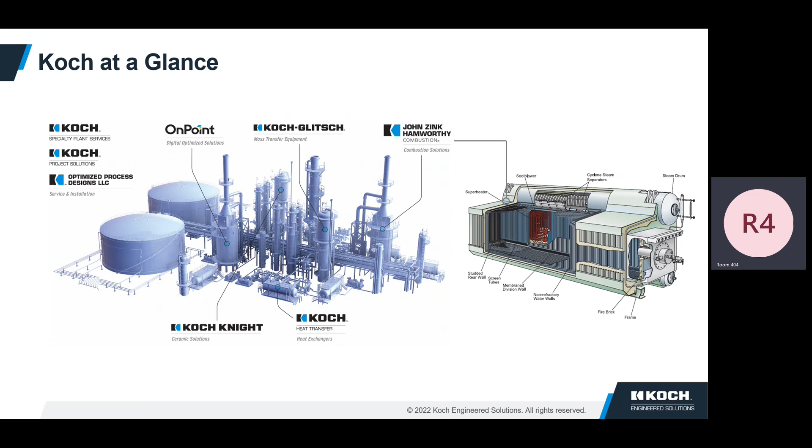But anyway, so what's driving our interest in hydrogen? We're all about greenhouse gas and the carbon footprint, stuff like that. And so...

This is nothing new. In various industries, people have been burning hydrogen for a while, and sometimes it's planned and sometimes it hasn't been. Like ethylene producers and stuff, they generate a lot of hydrogen, so they burn it in their process already. And there's been a lot of issues, but a lot of really good time-tested experience as far as how that works. And then sometimes in refineries, depending on how their fuel system is, sometimes they get to a hydrogen imbalance.

Like maybe a hydrogen consumer goes down, they're still generating a bunch of hydrogen, then they dump all this hydrogen in the fuel, and then they start seeing where that happens. Because a lot of folks have come to the various burner people and asked me, what does this mean to us? And we're going to touch on some of that too as far as the process. But actually, my question back is, sometimes you've been doing it already, you can just go back to your other situations and look at that as well.

So anyway, where are we getting this fuel from is going to be another thing. And we'll be comparing the fuel comparisons, comparing natural gas, hydrogen, and ammonia, and also other system considerations like the equipment, the safety part of it, transportation, and what's the impact on emissions. That's the two big ones right there, the hydrogen and the ammonia compounds.

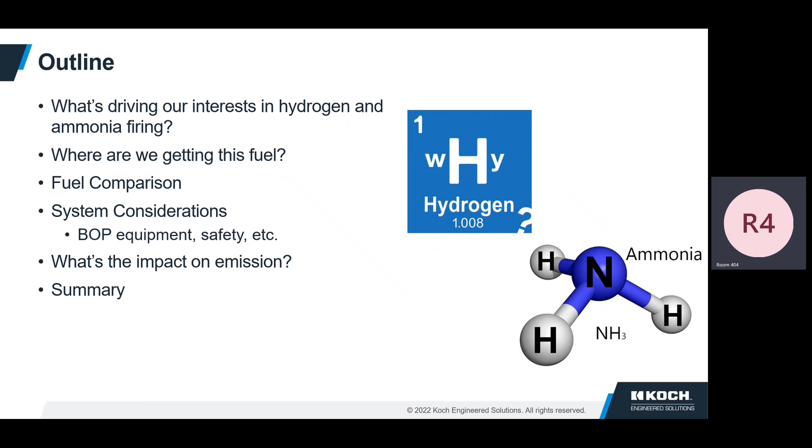So the future of combustion: how to convert the combustion process to reduce or eliminate carbon emissions.

Challenges - there's no easy substitution for combustion, so it's going to be there. We've got a huge base already, so how do we make that better? One of the potential solutions, like we already talked about, is green fuels - hydrogen and ammonia.

We've been going down this path for a while, and since the 90s we started changing burner technology to get lower emissions. What we found out when we started pushing those envelopes is that natural gas is not our friend in the burner world. It really isn't, because the flammability range of natural gas is much narrower than the other components here.

So the burner may work with a blend, and really as a burner manufacturer we love hydrogen - it reacts so fast to combustion, and it makes the burner real stable. But when we get away from that blend and go ahead and have just natural gas, the burner may become unstable, which has some issues.

Along those lines, it really took the industry about 12 years to understand as we progressed burner technology to ultra low NOx burners. No matter whose technology it was, the ultra low NOx burner was the square peg, and the heater was the round hole - and we're trying to make that fit.

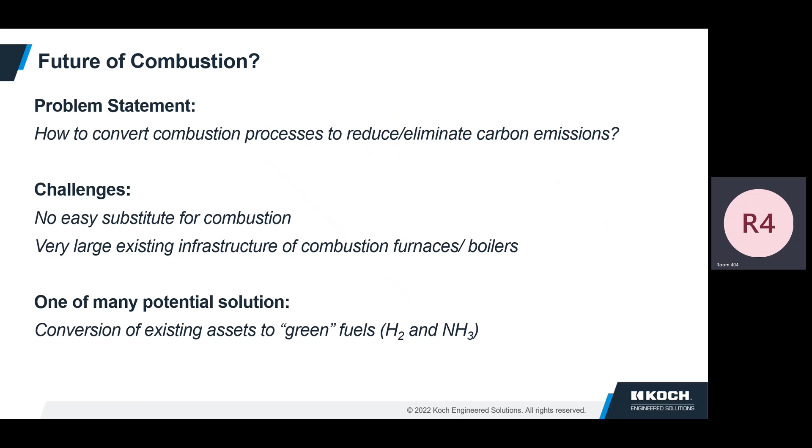People are talking about transportation, so they go ahead and liquefy it. European communities are getting geared up for liquid hydrogen deliveries, and a lot of people say we could use existing infrastructure such as LNG tankers to bring it over. But let's touch on the properties here relative to hydrogen versus LNG, specifically the boiling point.

If we're going to use an LNG tanker to transport liquid hydrogen from the Gulf Coast to Europe - LNG boil-off rates are typically about 0.1% per day. Using the same vessels, the same amount of insulation, the boil-off rate for hydrogen is 1%. That's a huge volume difference. It takes 10 days to get there, so that's 10% of the volume lost, plus the fact that the heating value is much less as well. So there's a huge imbalance there.

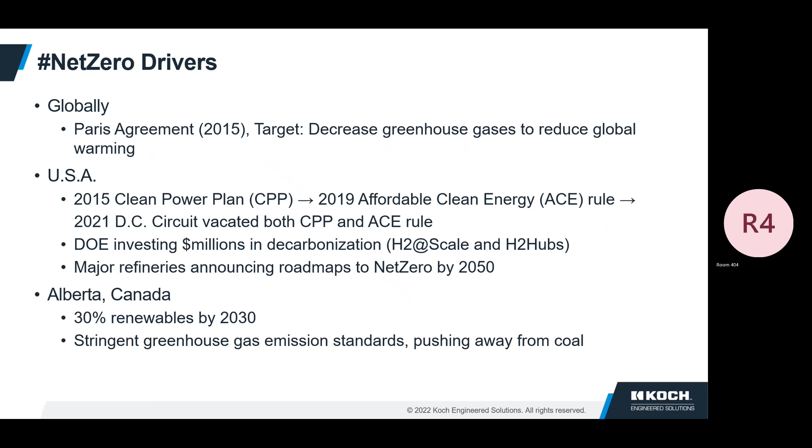So there's going to be a lot of learning as we go down these paths, much like what we had with the ultra low NOx burner technology - and that's all the drive, regulatory stuff and issues that go into it.

So where are we getting it from? Some of the hydrogen we're getting from water electrolysis, steam methane reformers, and ammonia. There's a lot of it. Actually, about 5 years ago, one of the major U.S. ammonia producers told me off to the side, I was at the site and they said we're going to market ammonia as the next fuel.

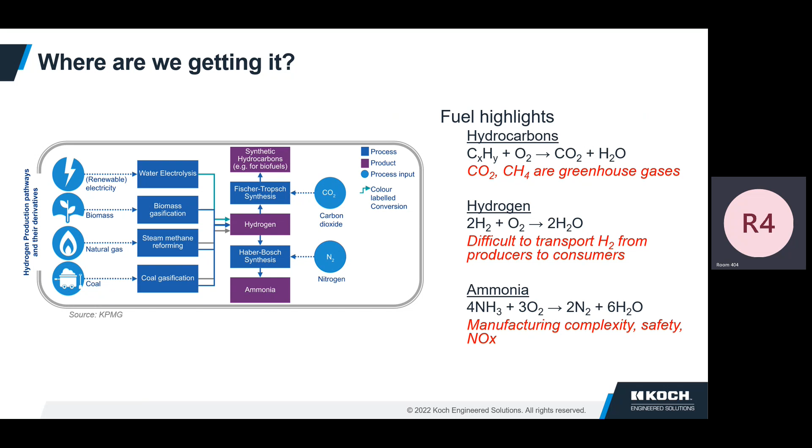Now, what drugs are you on? How is it going to work? Anhydrous ammonia - we can't even get anhydrous chlorine into some plants, and now you want tons of ammonia? But it's coming that way. It's going that way.

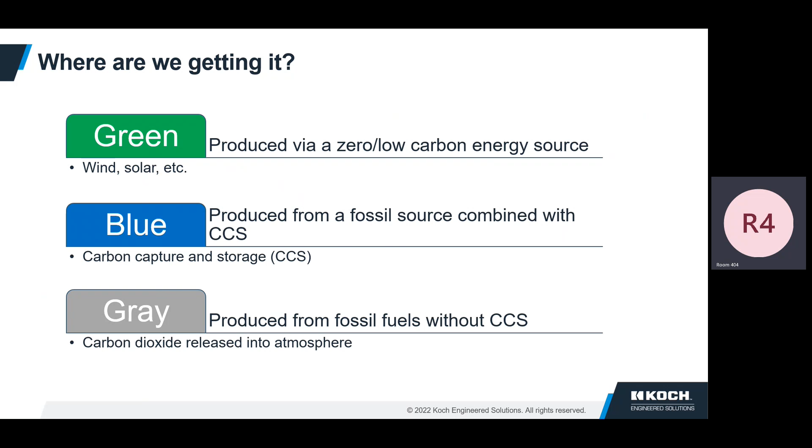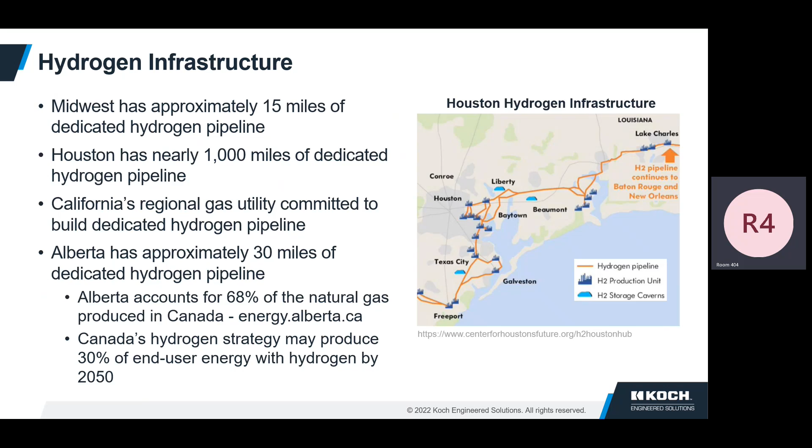We see a lot of people looking at the rationale of putting hydrogen producers on-site versus transporting it, but then looking at being able to export it out of the facility and capture carbon at the site. So there's good infrastructure keeping hydrogen as a gas, which is good. You can see relative to where the production units are, it's along the pipelines, and there'll be more of that to come. And here's the ammonia production.

So that's not much of a problem leaking as opposed to hydrogen. And of course the heating values are differences in the flame speed. Hydrogen is 7 times faster than natural gas, and ammonia is slower than natural gas. Why is that a problem? Well, the reaction time for hydrogen is much faster, and that's why it generates such NOx. Ammonia generates a bunch of NOx as well, because it's in the fuel bound versus the flame temperature.

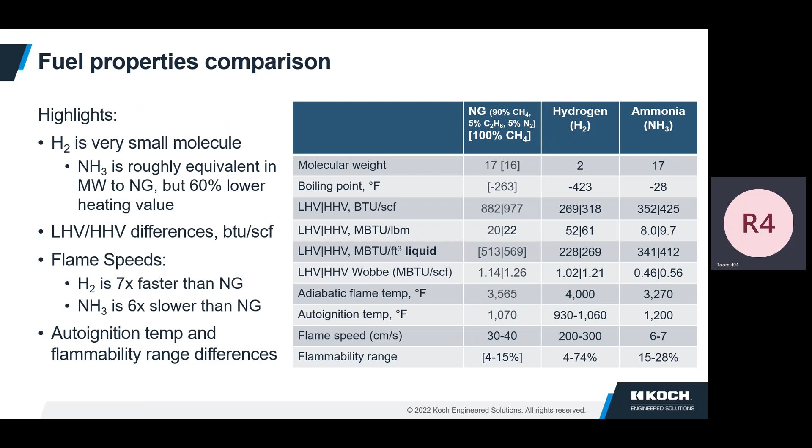They carry greenhouse gas, but because this hydrogen reacts so fast, it will lead that reaction first - there's a fixed amount of OH radical in the atmosphere. As hydrogen leaks more into the atmosphere, the reaction is going to be preferentially faster to react with the hydrogen and not with the methane. So the methane greenhouse gas effect will get worse in the short term if there's a predominant shift to more hydrogen leaks - that just came out earlier this year. So, like I said, there's a lot more learnings going on relative to hydrogen, alternative fuel stuff.

Interest in ammonia and hydrogen fuels - ammonia is definitely easily liquefied, easy to transport for sure. Doesn't have the boiling point, does not leak as easily. Consumes cost per unit, cheaper than hydrogen for sure. And it does reduce the combustion air fan size because its air requirements are a little less than - this is all reference to natural gas.

The hydrogen, there's a big emphasis on continued development of hydrogen hubs and infrastructure, high amounts of flue gas recirculation, and aggressive staging of the fuel as part of the technology we use at burner to reduce the NOx. And there's going to be even more going on with that. Several of the burner manufacturers are investing in having in-house ammonia facilities at their plants in order to help bring that technology more with more R&D inside their R&D centers.

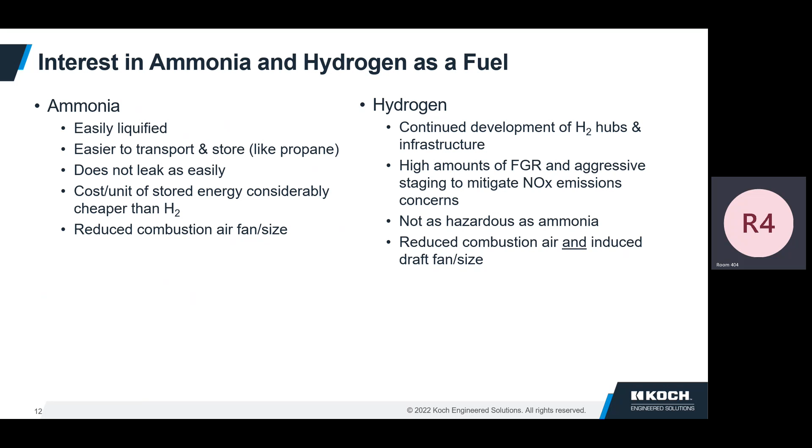And it's definitely not as hazardous as ammonia. And reduced combustion air and induced draft size, because since hydrogen reacts so quickly and requires less oxygen or air, the mass flow in the furnace drops a whole lot. So you see a shift inside the heat flux inside the furnace relative to natural gas firing. There's a lot of other things to consider relative to the effects it has in the process heaters when you swap out the fuel components, especially the hydrogen.

So here we have the combustion fundamentals relative to combustion air and fuel gas impacts. There's 22% less air requirement for hydrogen, 13% less for ammonia. Again, this is reflecting to natural gas. I should have probably had different colors for the three, because the blue is the fuel, the orange is the air, and the gray is the products of combustion generated off the particular fuel.

You can see with natural gas being the standard, ammonia requires more fuel for a given heat release you want. If you want to heat up something to say 1 million BTUs, for argument, it's going to take more ammonia than natural gas to get that desired heat. The combustion air will be less, but the combustion products will be higher. Hydrogen, you see, is going to require a lot more hydrogen because the heating value of hydrogen is so much less than natural gas. Natural gas is over in the 900s, hydrogen's in the 300s. So you see, it's going to be taking more.

So the system pressure, you need to squeeze more pressure into the system. But you see the air requirement is much less, that's the trend here. And the combustion byproducts are less, and that's because there's less air. I say air because air is oxygen and nitrogen - that freebie of nitrogen in the air, 79-80%, that freeloader goes in there, right? So if you have less air, that's less total mass.

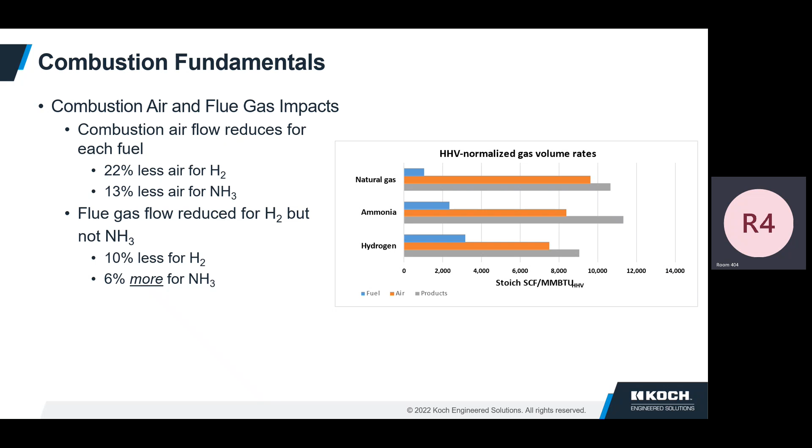I've seen it at a plant - besides the jobs prior to that, I was with ExxonMobil for a number of years, and we would have an isolation valve around a hydrogen compressor. It would leak through all the time. So we would take that valve out, test it, and it would pass the leak test, with certain criteria. Then we'd put it into a different application - it didn't do anything to it, it didn't leak at all. Because the hydrogen just found its way through it, being such a small molecule. And the pressures were different too, really, in actuality.

Ammonia, as we know, is a big hazard - definitely more hazardous to personnel, more toxic to personnel and the environment upon exposure versus the other two fuels. But it also has, because of that heavy base, a high concentration of corrosion products that can start generating as well. Because we're talking about most of it being anhydrous ammonia, and you have to deal with that stuff, so there's a lot of other corrosion processes that happen.

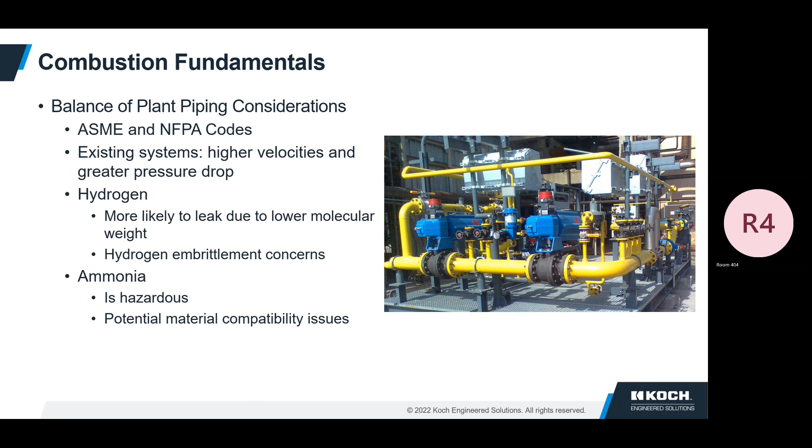Burner impacts include flame speed concerns for flame detection, because that deals too when burning high hydrogen fuels. Not only is the flame speed different, but the visible spectrum is also different, so some conventional scanners may be a little more challenged picking up flame detection. There's also burner technology concerns, depending on whether it's a raw gas or pre-mixed burner, because pre-mixed burners act very much like your barbecue pit—it will burn back in there with higher percentages of hydrogen.

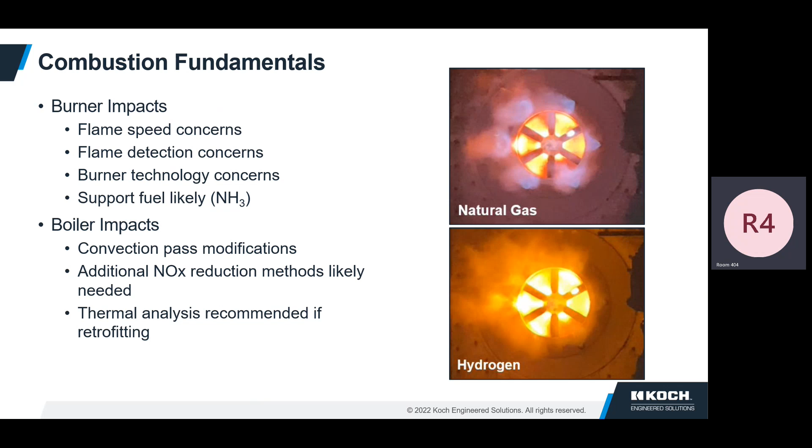Boiler impacts include equipment's convection section pass modifications, because of the less mass flow of the flue gas combustion products. The heat balance in the boiler will definitely be affected more so than in process heaters, and additional NOx reduction methods are likely needed for that, along with thermal analysis of the differences in heat flux profiles from burning the alternative fuels.

For emissions, burner NOx results show greater thermal NOx in hydrogen versus natural gas, due to a lot hotter flame temperature. For those who don't know, in ultra low NOx burner technology what we do is try to reduce the flame temperature—we're not reducing the heat level. We do it by using preloaded nitrogen to go in there and help absorb the combustion reaction. That's all it is, a reaction. The heat of that reaction lowers the flame temperature, which then attacks the thermal NOx.

There are three different ways for NOx to be generated: one's thermal NOx, one's fuel NOx, and one's prompt NOx—that's another animal altogether. But there's no prompt NOx contribution from hydrogen. And of course, the influence of hydrogen on NOx emissions strongly depends on the burner technology, which it does.

For mitigation, you add or increase the FGR, flue gas recirculation, which tries to reduce the flame temperature even further. But you get to a point where you may start getting into burn stability issues if you reduce it too much. If you start shifting—since it's a chemical reaction—if the reaction temperature starts to drop off, the flame may not be as stable.

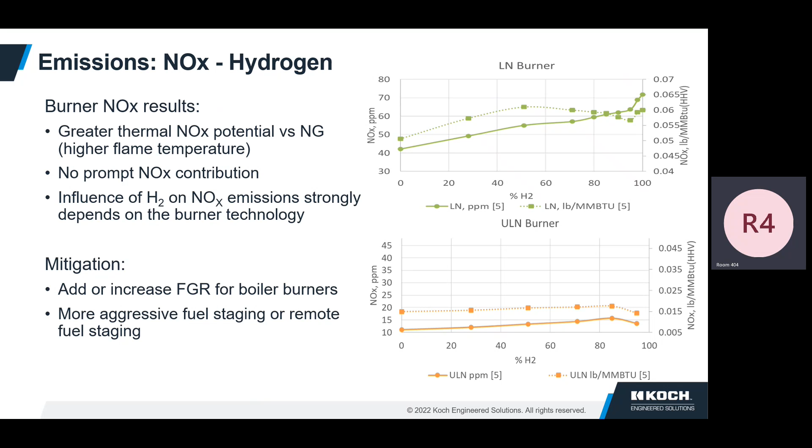Then there's more aggressive fuel staging or remote fuel staging—another technique. Instead of bringing external flue gas recirculation into the burner, we inject the fuel out into more of the inert part of the furnace or boiler in order to reduce the flame temperature or lower the heat flux inside the furnace.

Now we're talking about ammonia emissions. It's a precursor for NOx because it's got fuel-bound nitrogen in it—that's part of NOx. It's a big nitrogen thing; on the other side, it's NOx in the air, but here we get NOx in the fuel. Definitely we don't like that—as burner people, we don't like that.

Like I said before, it took us 12 years to figure out how staging fuel took care of the effects on process heaters and stuff. We have a learning curve here as well.

Typically it's like several hundred ppm with an optimized burner for ammonia, versus several thousand ppm otherwise. With staged fuel ultra low NOx burners, current technology that's been out there for a while gets maybe 20 ppm thereabouts. Various burn technologies coming out now are getting sub-10 ppm or even sub-5 ppm. With ammonia, you see it's from several hundred to several thousand.

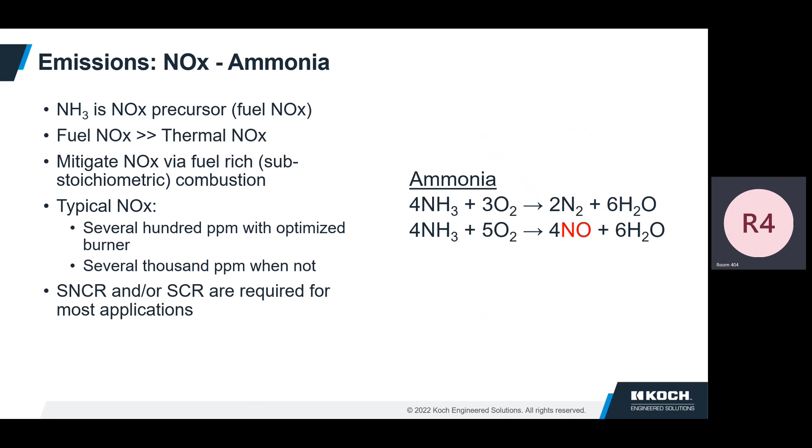So R&D is continuing—everyone's doing R&D on that. Hydrogen test burns at Tulsa, we've been doing, even before '21, because a lot of plants were already doing it, and we were reacting to that even back then, prior to it.

Ultra low NOx burner technology with fresh air, preheated air, comes into play when dealing with thermal NOx. Some burn technologies, even the latest stuff out there now, aren't impacted as much by preheated air because of the technology employed. Additional flue gas recirculation for NOx reduction is pretty significant, which we're seeing in newer burner technology—we get down to single-digit NOx emissions for the hydrogen part, and it's very stable at high flue gas recirculation rates.

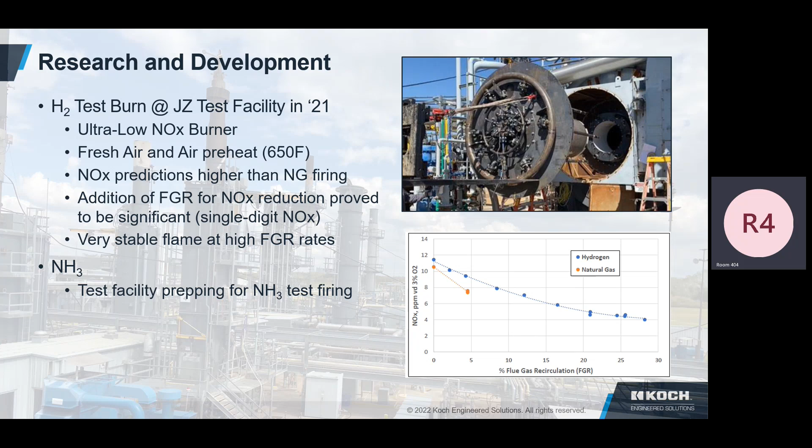So in conclusion, I ran through this pretty quick, so I'm not going to dive deep into it, but this is all new emerging stuff. We're just touching on some of the things we see as of right now. Not to say it's not a good thing, just that there's some learning to be put forward. I love the hydrogen part of it. It's got to be in its right place because there's so much more we don't understand relative to when we start expanding it out, like special design systems, burner modifications, new larger gas trains,

to support the fuel of ammonia. I mean, some people are not looking at using ammonia as a fuel as much as a carrier of the hydrogen. You get transported from A to B. It's much easier to transport than liquid hydrogen.

Now, which is a big deal too, and then the separation of hydrogen and nitrogen, which has a lot of value as well. It is much better to transport it that way, but then now you're dealing with all this ammonia, right? And anhydrous ammonia gets from point A to point B, and it's not a silver bullet, it's not a slam dunk one way or the other, we are learning more.

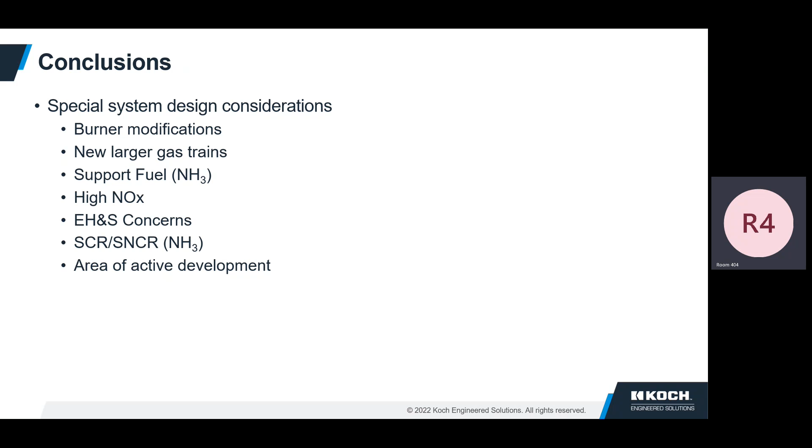So then what do you do? You get the hydrogen out at sea, or you go ahead and have to burn it in the ship for part of the fuel, and then you have to deal with the NOx that's generated off of that. So there's a lot of arms and legs in there that we have to get developed, and we are working on a lot of those things as an industry. And then the other post-combustion treatment technologies, which tend to use ammonia again, the SCRs and SNCRs, and of course that's an area of a lot of development there.

So anyway, I didn't put this all together, but some of my cohorts did, so that's the credit to those guys. And Mark did this very similar presentation for the American Flame Research Committee earlier last fall. So, any other questions?